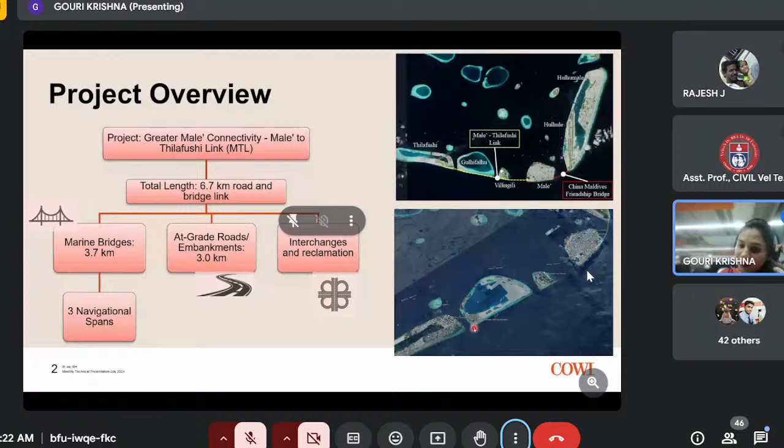What will happen is, for making the bridge at grade level, meaning at the ground level, sometimes there won't be any ground. That is what will happen in these Male islands. We will be taking the bridge in this fashion, so when we take it that way, we won't have any ground over here. So what we will do is reclaim the land - we will put fill material in this water portion, layer by layer, and bring it up to the ground level, and then we can easily take the bridge through the ground level. That is called reclamation.

Now I want to show you a video of this 3D rendering of this project so that you will get an idea.

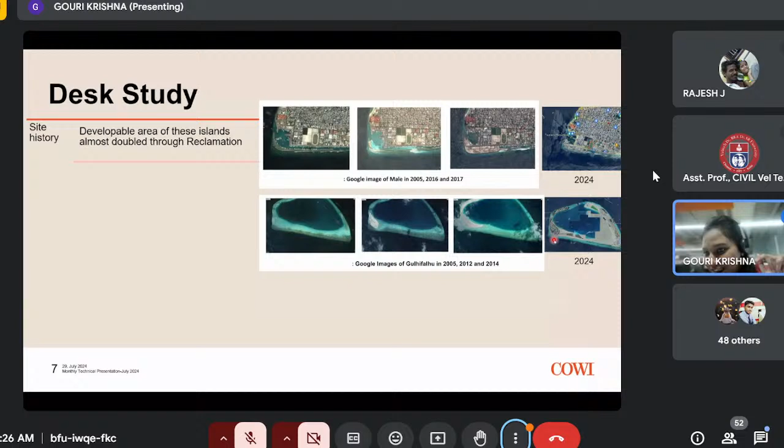In 2005, 2016 and 2017, you can see the development, how it is happening. In Gulhifalhu, it was just like a lagoon sort of island initially, which started getting reclaimed in one portion, then the reclamation extended in this fashion. Recently, when I was preparing this presentation, I looked into how it is looking now - the image quality has also improved, and you can see in Gulhifalhu some construction has also started.

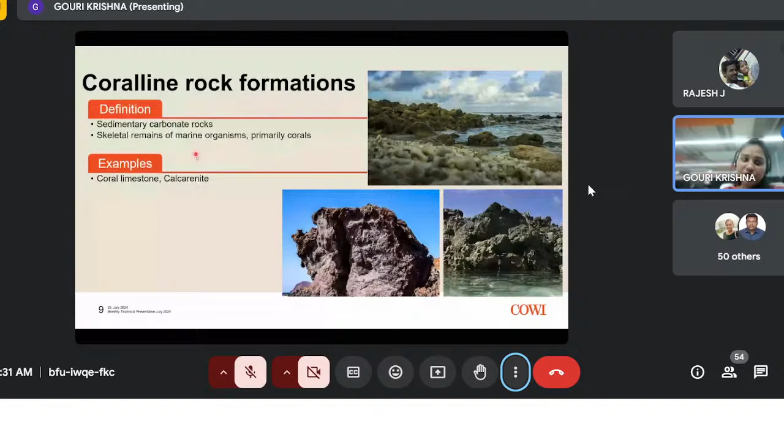Now coming to coralline rock formations, these are some pictures. You can see some porous coral form. As it ages, it will become harder and harder, and that is what you see over here. The major thing about coralline rock formation is it will be of carbonate content, and it is actually skeletal remains of marine organisms, primarily corals. Some examples of such rock formations are coral limestone and calcarenite - these two were part of this project's geology also.

The property will be highly porous, meaning so many pores will be there, and it will be permeable. When so many interconnected pores are there, permeability will be really very high - permeability is basically the capacity of water to flow through these rocks. It will have variable strength and cementation also - where pores are less, strength will be more, but where pores are more, strength will be less. We have so many pores, they call these cavities also.

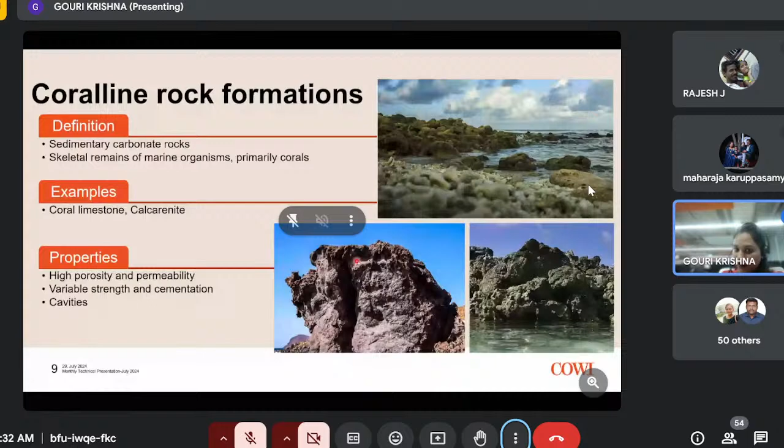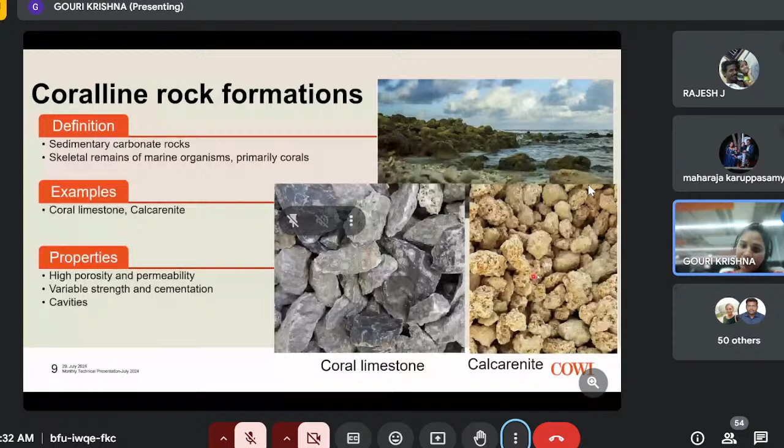What will happen is when we go underground, where the pores are multiple in nature, that portion alone would be like voids - there will be no rock formation, and that is called cavities. This is some example of coral limestone, how it looks, and calcarenite. Coral limestone is a bit stronger than calcarenite, and pores are also lesser in this; pores are a bit more in calcarenite. We will look into more on that.

Now, as I said, we are doing this design as per British standards, BSEN, British standards as per European norms. These are some list of the standards followed. We had a standard in which general rules, principles of geotechnical design are given. Then we had a code for following ground investigation and testing, how that has to be done. Then for the seismic part, earthquake design, we had two codes.

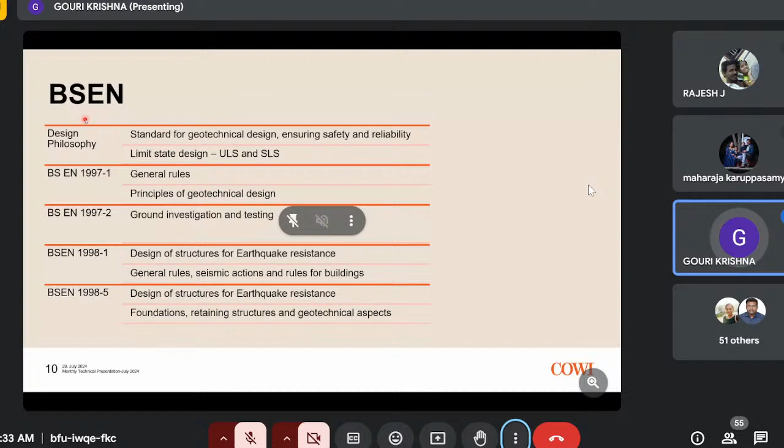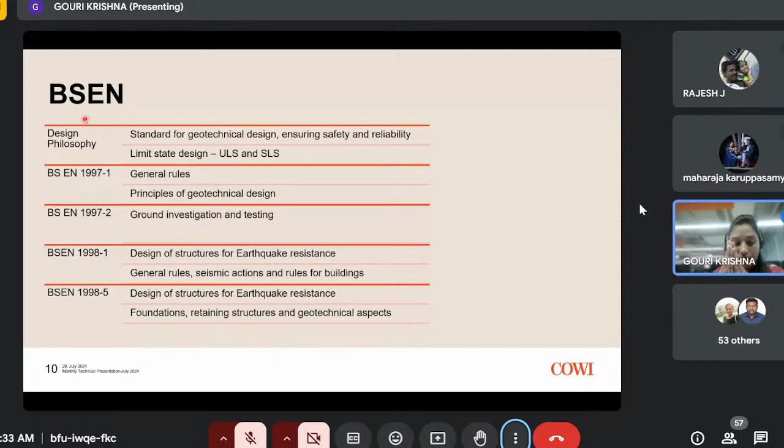Now, what is the difference between BSEN and our normal Indian standards? In Indian standards, we have something called factor of safety. For example, pile design - we are designing it for a load of 1000 kilonewton, and our factor of safety is say 2. If our factor of safety is 2, we have to design a pile for 2000 kilonewton, meaning we are getting a resistance of 2000 kilonewton divided by 2. Like that only we will be designing a pile in our Indian standards. But coming to British standards, we have a concept called limit state design, which is nothing but checking two things: ultimate limit state and serviceability limit state.

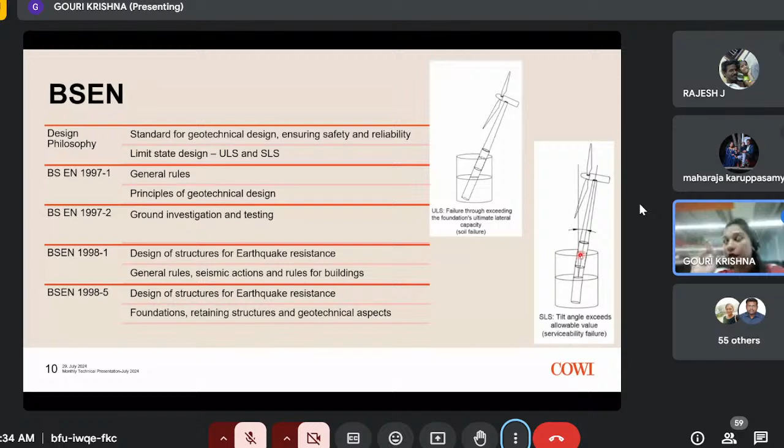So what we will do is check for these two things: is the structure actually failing, or is the structure only surpassing the serviceability criteria? Both have to be checked, and whichever gives a lower pile resistance, that is what we are going to recommend as the pile capacity.

Now coming to BSEN, we have something called geotechnical category, considering many things like risk factor, the structure's relevance and importance, available test results — all these things we use to categorize the structure. In a full bridge structure, this category is basically for how much importance or attention we should give when doing the design. Let me explain that.

So we have three categories. Geotechnical category one will be small and simple structures which don't have any risk. For example, we are constructing a bus stop on top of very good ground, so there we don't have much risk. It's a small structure, doesn't have much load, only people will be coming and sitting. Residential buildings and such places don't have much risk to consider, no heavy load or unpredictable conditions. So that comes as category 1.

Category 2 are structures that are done and studied types. For example, a three-story building or a bridge, if it's a repeated sort of project. We constructed some one kilometer bridge, and we are going to extend it another kilometer. We already know everything — the ground type, the whole design — so designing the next kilometer would be very easy, and that falls into geotechnical category 2.

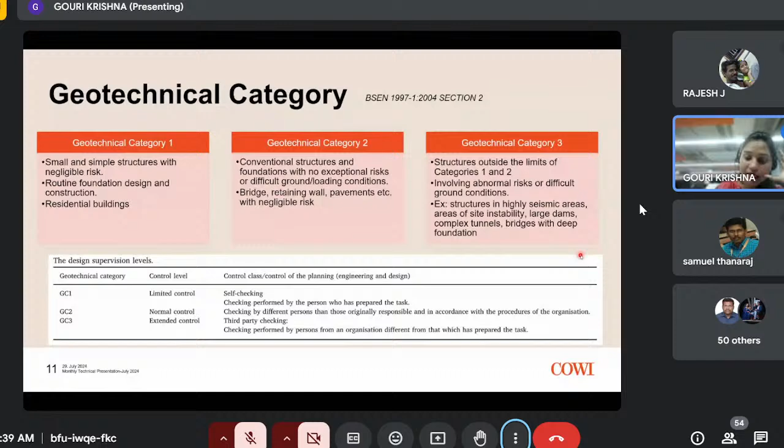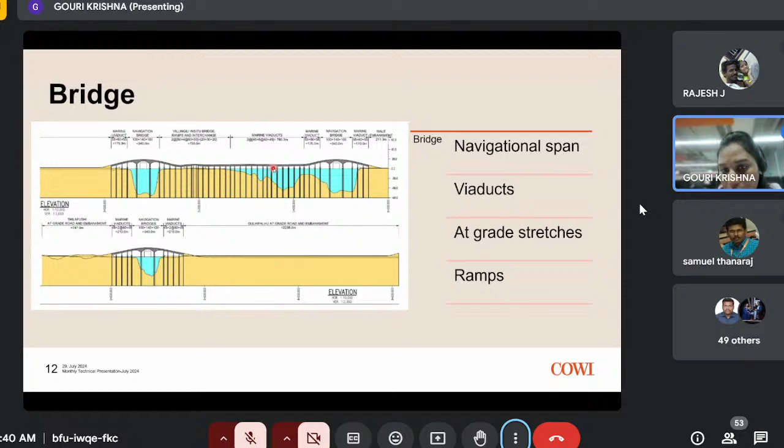These portions are all marine bridges, and over here you can see these are all at-grade stretches. This much at-grade stretch we had. And we will have ramps also - when we go from the ground level to the higher marine bridges, then we will have ramps. Here also we had a ramp like that.

Now this one structure, say for example a four pile group, and we are seeing the elevation, a cross section in this manner. What all will we have? We will have a pier - this is the bridge running. Below that we will have a pier, and just above the water level we will have a pile cap. Then piles will be there, and the piles will be embedded into the ground. This is the structure.

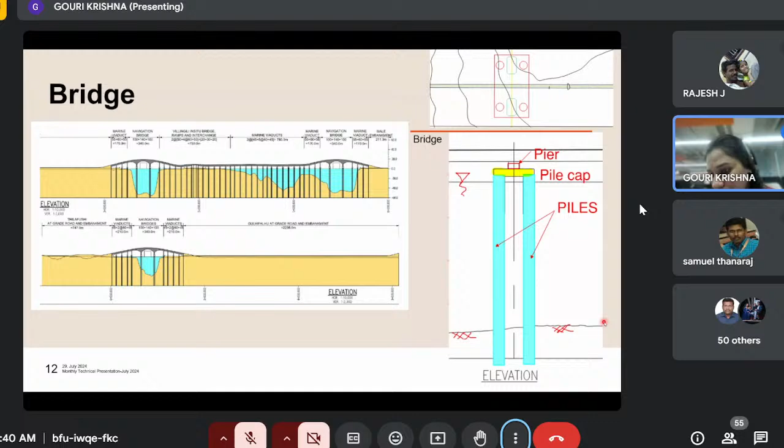Now just to take you through the type of piles and give an idea about piles - a pile is something which will run through lower density material and take it into higher density material so that it can sustain some load coming from the superstructure.

We basically have two types of piles: replacement method, where we remove the soil and put a pile there, and displacement, where we push the pile and drive it in. So in that method we are displacing the soil - when soil is removed, we replace it with the pile. So these are two different types of piles.

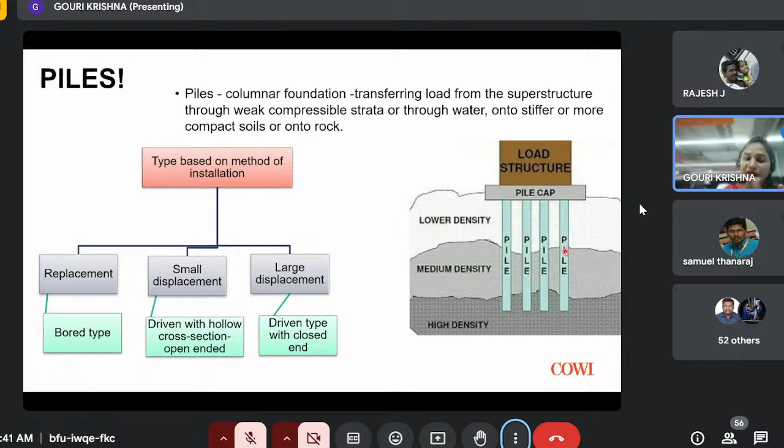Replacement piles are basically called bored piles, and displacement piles are called driven piles. In driven piles we also have differentiation like small displacement and large displacement. When a lot of soil is being displaced, it's called large displacement - when a solid pile is driven, it becomes large displacement. But if a hollow pile is being driven, it becomes small displacement, since a little ground will enter the pile and only a little portion of soil gets displaced. So that is hollow piles.

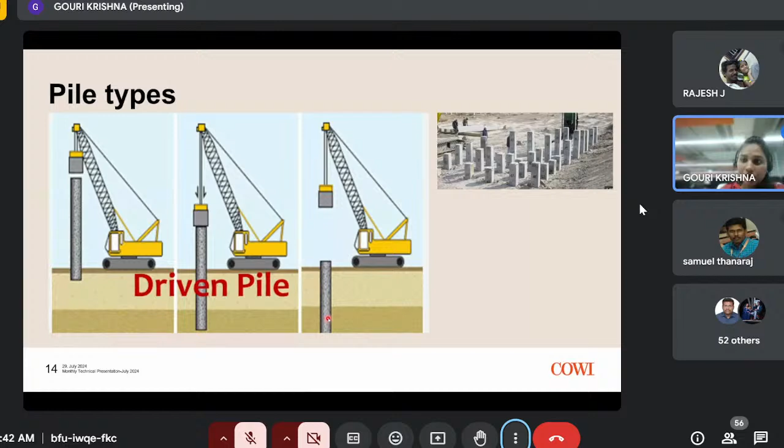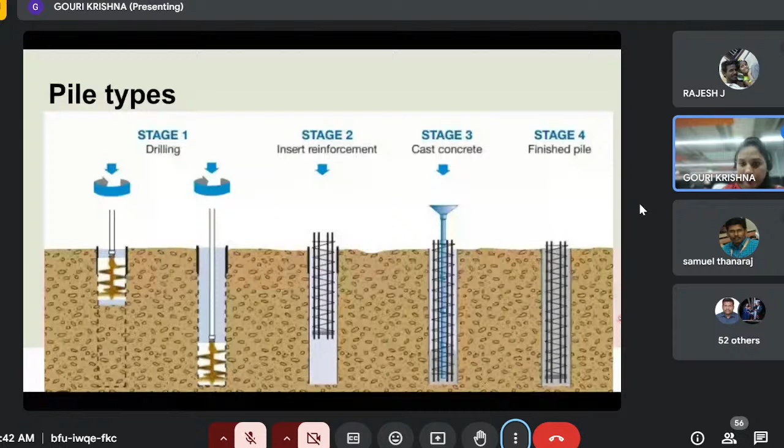So this is just a demonstration of how a driven pile will be - we will be pushing it into the ground. These are examples of driven piles. And now for bored piles, we will be boring, putting a reinforcement cage, and pouring the concrete. This is how a bored pile is made. So in our project, we went for bored piles only.

Now let's see how the ground investigation was done. Before doing ground investigation, we should understand the stages of the project.

So initially a project will be proposed. Thereafter a tender stage will be there where the client gives out the tender, and companies who want to do this design will submit a tender quotation. Many companies will apply, and the client will have many criteria - is it economical, who is giving the lowest cost, or who is more experienced in such projects. Based on that, they will award it to one of the contractors, and the contractor will then put a designer in place.

Designers will initially do a preliminary design based on the already available ground investigation. After that, a detailed design will be proposed, which will finally be done on site. And after all the design and construction, we will do a design validation. For example, for piles we are constructing, we will maybe check 1% of the total piles - if 100 piles are there, we check one pile for pile capacity, to see how much capacity that pile has, like that.

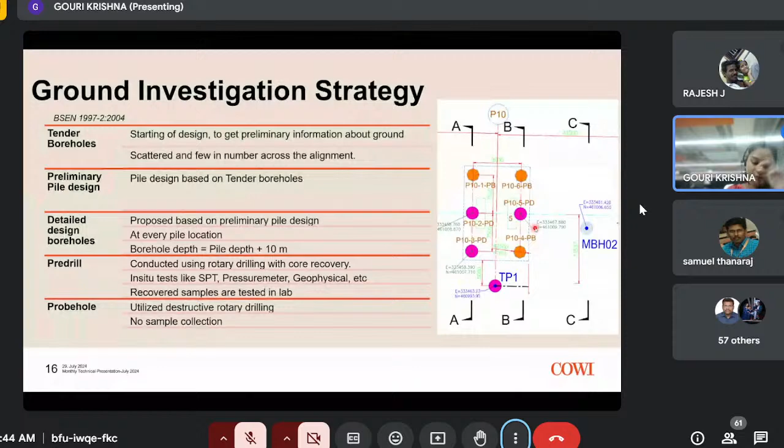Now, what all tests were done? As you all know, SPT was done. Why SPT and not CPT? This is just a general rule of thumb. From my experience, if it is cohesionless soil, then SPT is better.

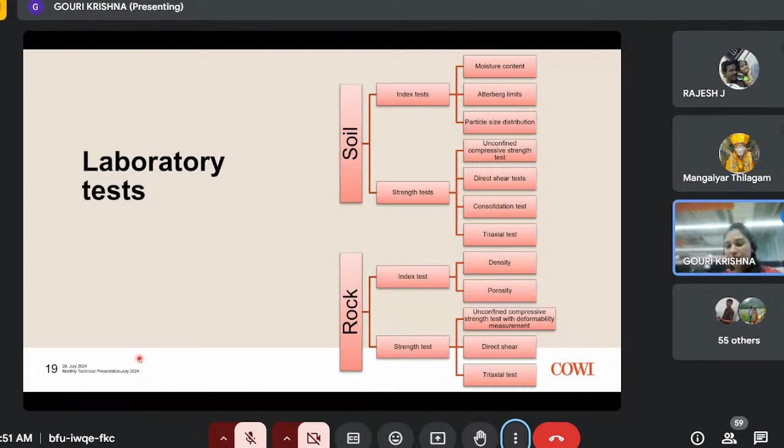Now coming to rock, we have the same distinction of index test and strength test. To identify what type of rock it is, we need basically density and porosity. For strength test, almost similar tests like soil are there for rock: unconfined compressive strength test, when we do UCS test in rock we can also measure the deformability, elastic modulus of the rock. Then we have direct shear test and triaxial test also for rock.

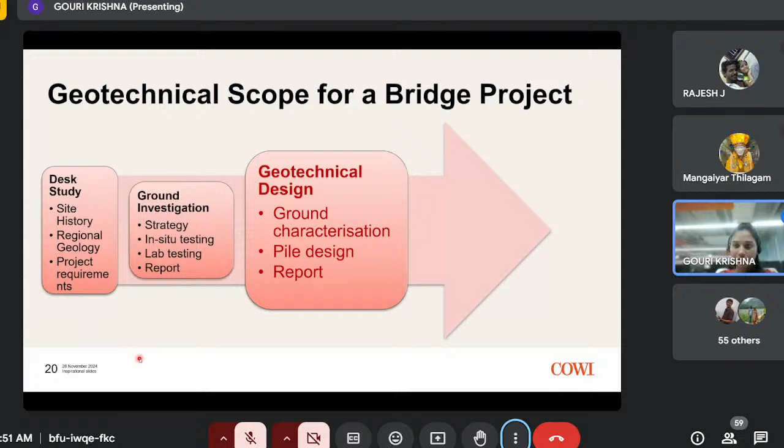We have now discussed the desk study, we have discussed ground investigation. Now let's come to the geotechnical design, our main part. After that, we will look into mitigation measures and pilot test also.

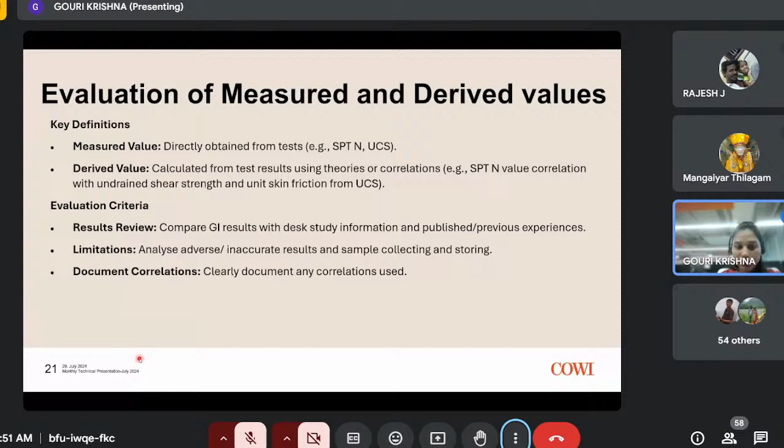Regarding ground characterization, we need to characterize the ground. For that, we have to do two things. First, we have to analyze the distribution of data. How do we analyze the distribution of data? To understand it, we can plot.

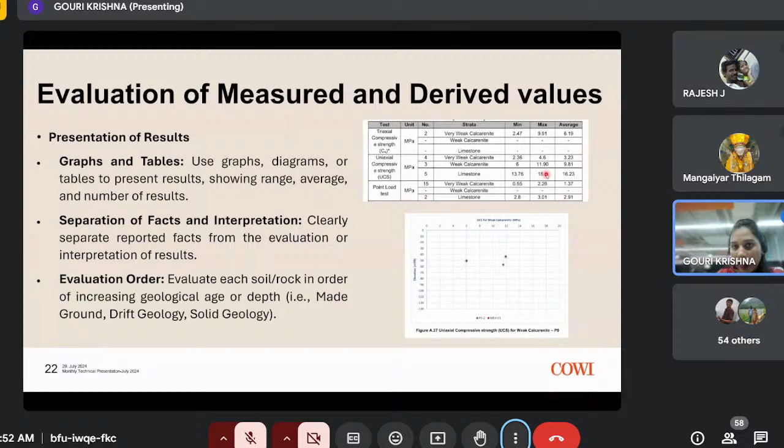Here you can see UCS plotted against the elevation of ground. So we understand the range of UCS is 6 MPa to 12 MPa in this particular portion, minus 40 to minus 60. Then we can go with number of tests and minimum-maximum of all these values, and like that we can check. Once we do these things, we get an idea of what the distribution range is.

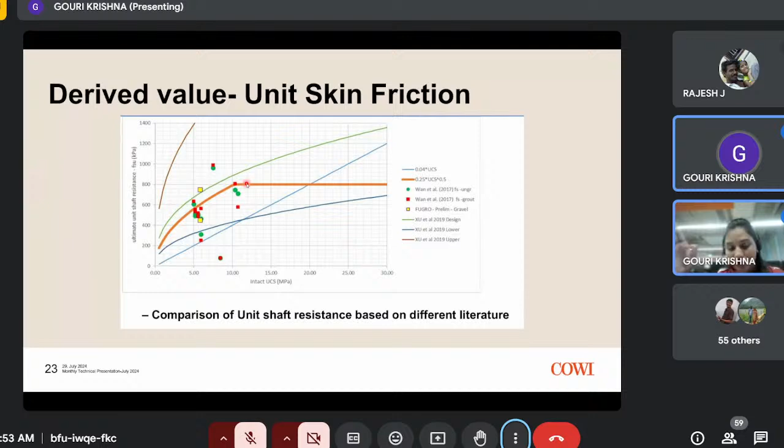The problem is we have results here and there only, but we are generalizing the ground as a whole, so we need such characterization to do that. That is what we do with characterization.

Before going into this, let me run you through some important parameters of this project: SPT, RQD, and UCS. SPT, as most know, measures how many blows occur over 30 centimeters. RQD is based on a 1.5 meter rock core, where we check how much of the core recovered is more than 10 centimeters long. That recovered length divided by the full 1.5 meters, times 100, gives you the RQD, which indicates the rock quality, or how much rock we can retrieve without it breaking.

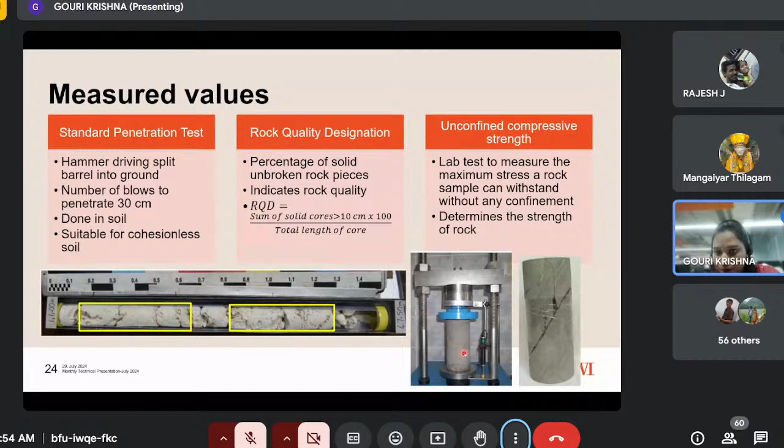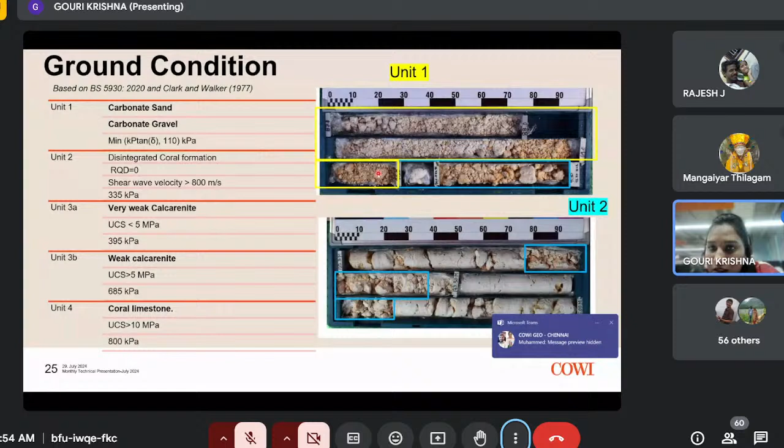Based on all these test results, we divided the whole ground into four units: Unit 1, Unit 2, Unit 3, and Unit 4. Visually, samples that look like sand with broken particles we called Unit 1. If the pieces were a bit bigger, we called it Unit 2. Whatever we could retrieve as a solid core, that didn't break like this and was a solid cylindrical core, was either Unit 3 or Unit 4.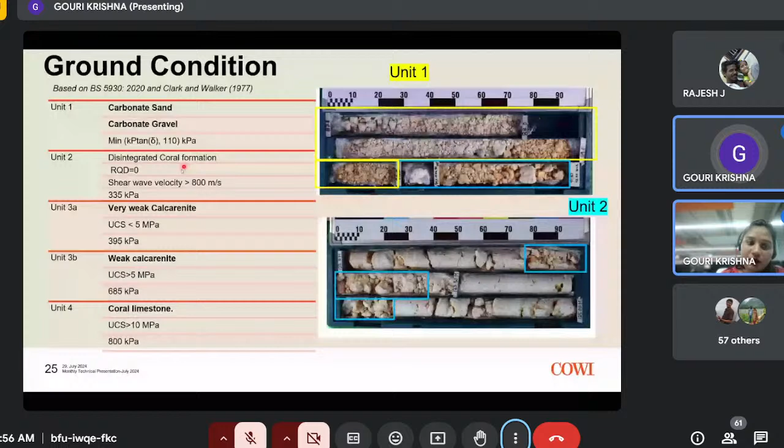Unit 3 was whichever had UCS in the range of 0 to 10 MPa, and whichever was more than 10 MPa we classified as Unit 4. Unit 1 and Unit 2 had a distinction based on shear wave velocity, which I talked about in previous slides. If it's more than 800 meters per second we called it Unit 2, and if less than 800 we called it Unit 1. This 800 meters per second is a distinction value for rock versus soil. So even if a sample appears broken, we believe it was broken due to the sampling process and is actually intact rock in situ -- that's why the shear wave velocity came above 800 meters per second, and we called it Unit 2.

Now let me show you an example of the distribution of all the UCS values. The average might be somewhere around 3 MPa -- average is the value where 50 percent of values are below and 50 percent above, also called the median. We took a value just below that average, because the distribution is quite spread out, so we can't just go with the average. It's better to be conservative, meaning on the safe side, so we went below the average.

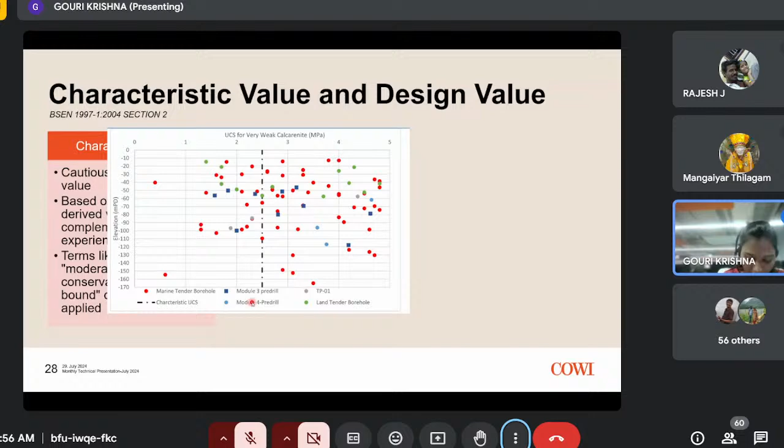Now I will talk about a few things we need to be aware of while doing pile design. First we need to understand how the pile is behaving - is it behaving as a group, or individually? This difference comes based on the spacing. If the piles are widely spaced, individual pile action is more prominent, but if closely spaced, group action is more prominent.

Another thing we need to be aware of is loading duration and variation. Are there any temporary loads, like what loads come on a temporary basis during construction? What are the permanent loads? We should also think about overburden and groundwater - is there any chance of overburden in future, or how much the tide will vary day-to-day? Maybe after 100 years, what will be the tidal level? Such things we should check.

Then we have a choice of pile type, like ground type, based on - as I said before - we have bored piles and driven piles. So that we should decide based on ground type. Here we had so many coral reefs, so if we do driven piles, that will involve hammering action and so much vibration will pass through the ground.

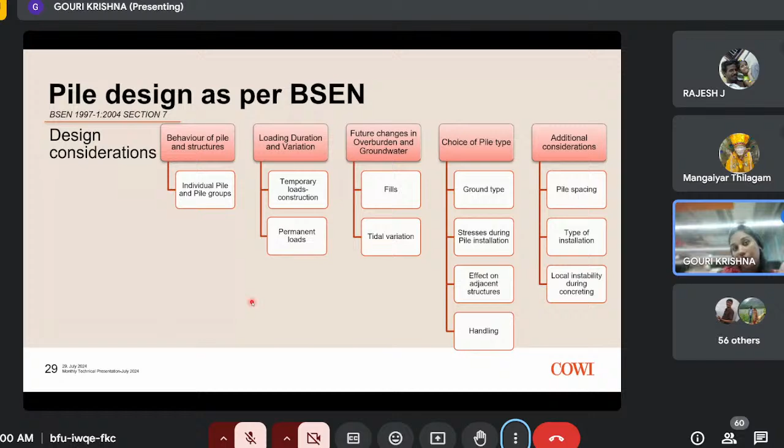Then some additional consideration is pile spacing and type of installation. Also, while doing concreting, will there be any local instability? Sometimes when we have cavities, if that cavity was not identified before boring, and we pour concrete, the whole concrete will be lost through those cavities. If we are aware of such things before going into that, we can somehow prevent them.

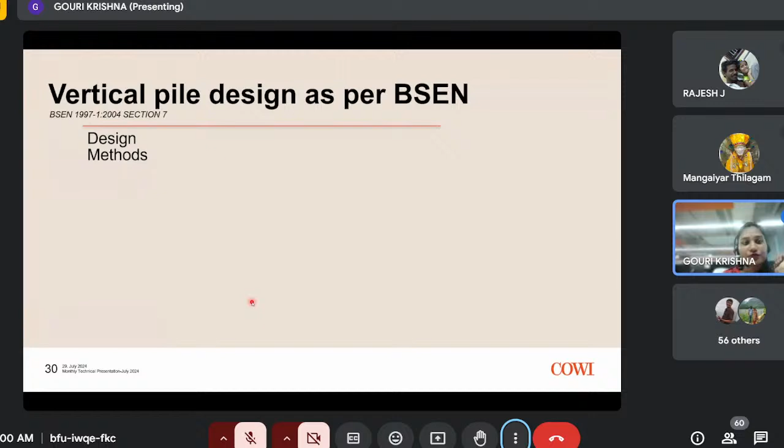Now for doing vertical pile design, we have empirical methods that you would have studied - like the cohesionless and cohesive soil formulas you would have seen, that is basically empirical methods. Then we have static pile load test, where we test the pile at site, and also dynamic pile load test. These two pile load test results give us the pile capacity at the site - how much load it can take for a particular deformation - and through empirical methods also we get the pile capacity.

So these are some of the design methods. How this becomes a design method is basically, we will do a sacrificial pile with similar construction method, similar diameter, similar ground type, just for the purpose of testing, and understand how much capacity it has. When we do a similar working pile with same diameter, same type of concrete and same type of ground, we can confirm that pile will also have the same capacity. That is one method, but it is costly - we can't keep constructing many piles and checking. So that is where we have these empirical or analytical methods to find out the pile capacity.

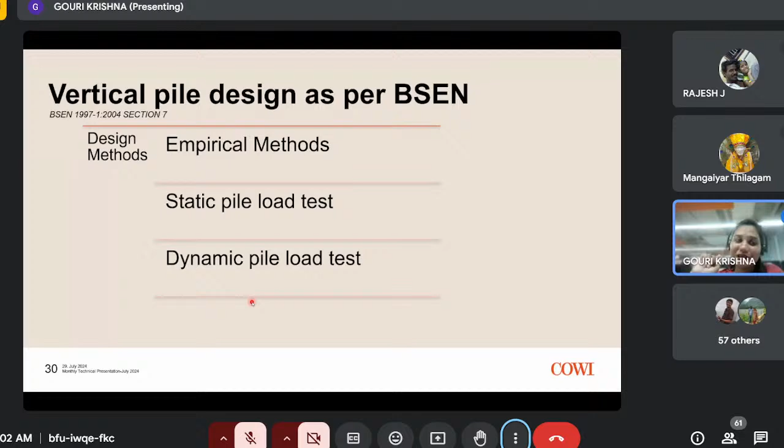Now this BS EN had a difference. As I said, Indian code has factor of safety, right? But what we have in BS EN is something called partial resistance factors, where we have different factor of safeties for base capacity, skin resistance, and for tension.

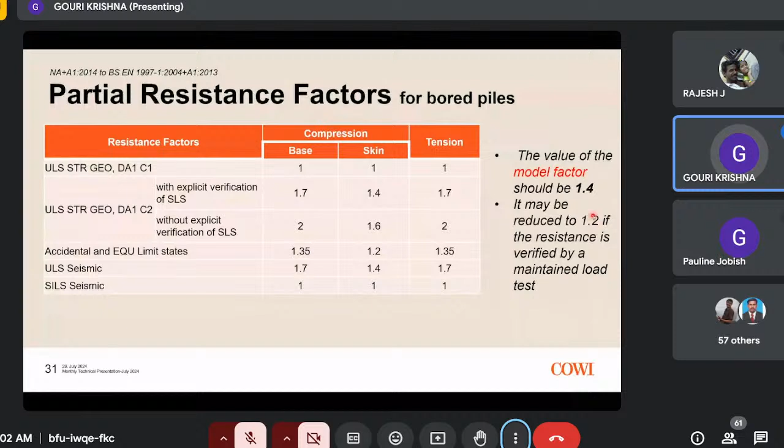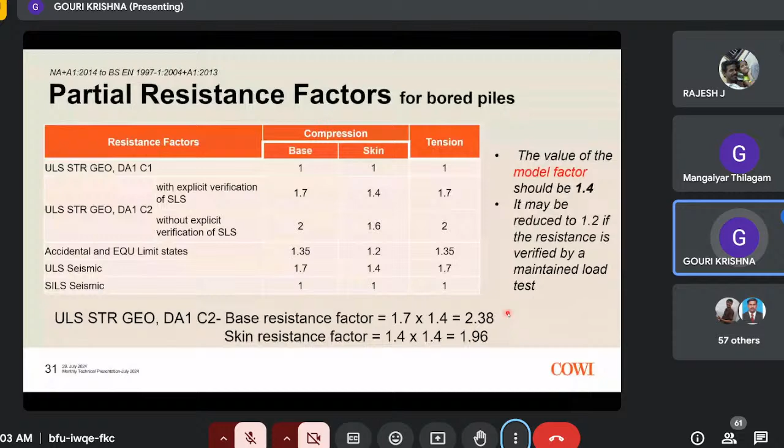So this 1.4 and 1.2, this 1.4 will be multiplied with the skin resistance factor, and that is what the final skin resistance factor will be. Similarly, base resistance of 1.7 will be multiplied with 1.4, and that is what we have to divide the ultimate end bearing capacity with to get the safe bearing capacity.

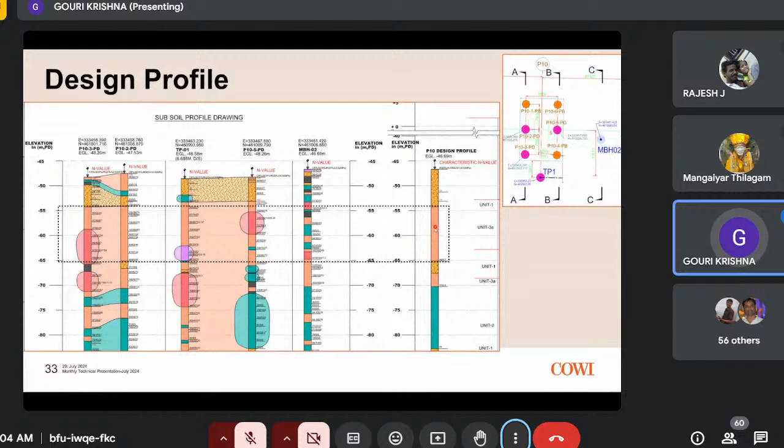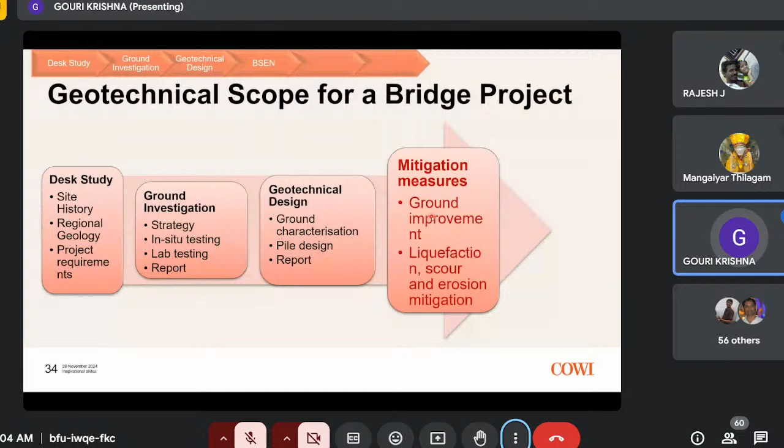Now we will see about the mitigation measures. Here, no ground improvement was required as such. We just had reclamation here and there. Then for liquefaction, scour, and erosion, what we did is identify what is the scour level.

Relative movement will be there between pile and soil, and that is how the pile capacity is being formed. So if there is a deflection between the soil and the pile, there won't be any friction and there won't be any skin resistance. So it is basically to reduce the skin resistance by a factor until the fixity level, especially when the pile is in marine conditions and has a long freestanding length.

Freestanding meaning the pile portion above ground. In such situations, the deflection will be high, and this sort of reduction up until fixity level is something we should be cautious about. So that also was done over here.

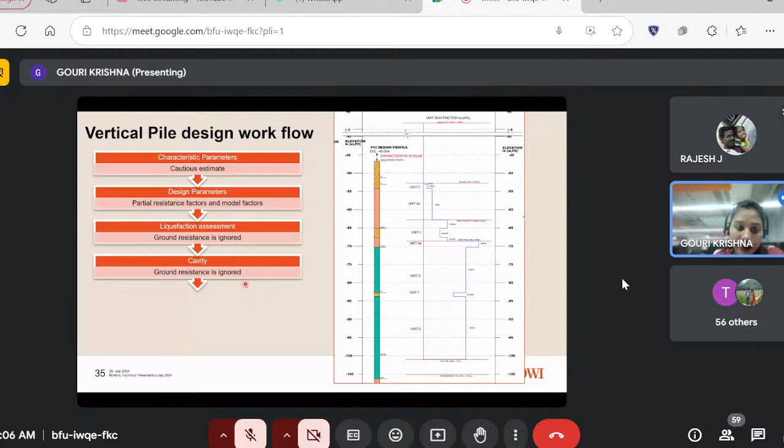If liquefaction was there, liquefaction was also ignored. Thereafter, cavity also, if there, was ignored. So what we did is measure the total length of cavity up until the pile length, and that was added at the end as extra pile length. Then we had cyclic loading, which I mentioned reduces skin resistance until fixity level. Scour ground resistance was also ignored.

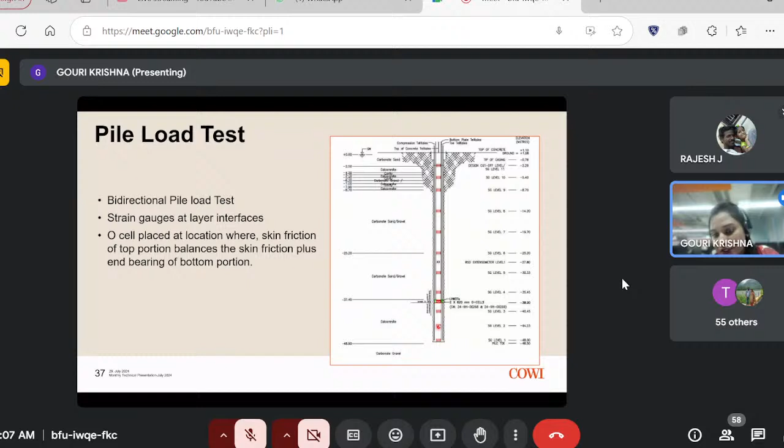Now we looked into all these things, and finally we have the pile load test. Here, bidirectional pile load test was done, where we put a load cell at a particular depth where below it, the skin resistance plus base resistance equals the skin resistance above. So we put a cell there and load it in two directions, to find out how much skin resistance is there in each of these layers.

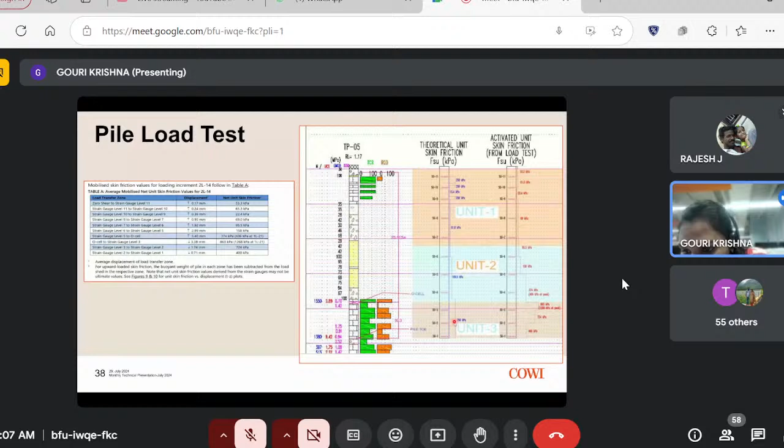So when we found out like that, over here we took some 250 kPa for design, over here we took 109.5 for design, and finally we got some 374 kPa. So we are validating that our design value is fine.

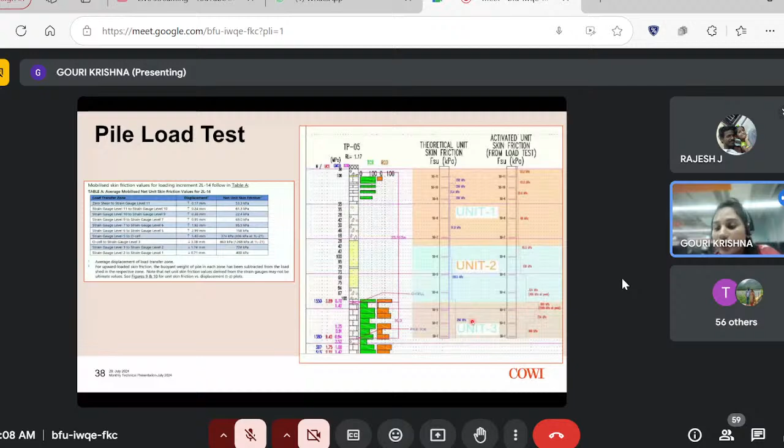And over here what happened was, the values we measure, we can use only if the resistance goes above, reaches a peak, and it mobilizes into a straight line like that. If it doesn't mobilize in that fashion, it indicates that the pile has not reached its ultimate capacity. So over here you can see that difference.

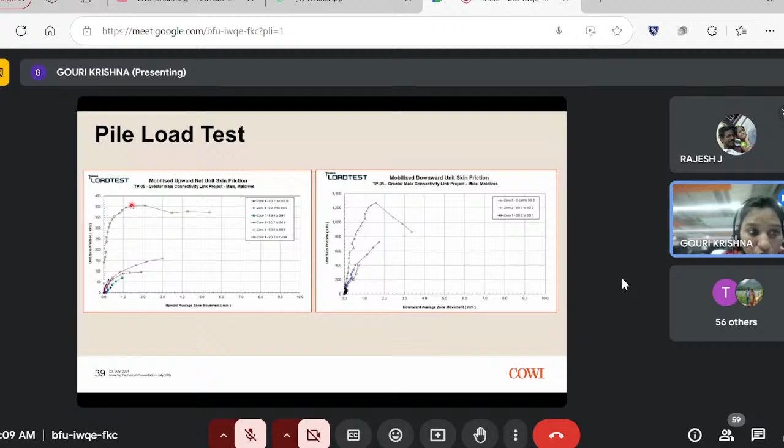This is unit skin friction versus movement plot. So the pile is moving, or rather pile is displacing, that is pile deforming, that's the correct terminology. That is happening, but what you can see here, it is not mobilizing and has not reached the peak value. So some more threshold resistance is there inside the pile which we were not able to test out, but maybe for this layer alone we were able to do it because it reached the peak and mobilized.

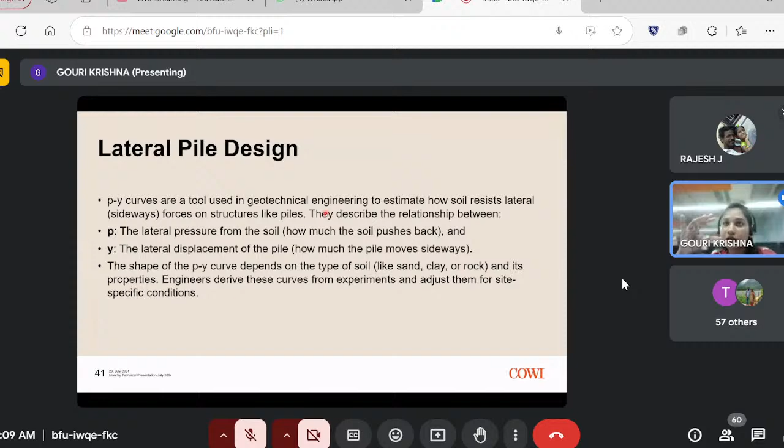Something interesting in this project, a bit different, was how we estimated the lateral pile design. For getting the lateral pile behavior, we have something called PY curves. For a particular P value, that is lateral pressure, how much lateral displacement will happen in the pile. Such curves we have for different types of soils.

This P and Y behavior we can input into structural softwares like Midas, and that is how we simulate the soil in those softwares. So this is how we do the structural design and simulate the soil.

Basically, as per my knowledge in the industry, we have different softwares for structural design and geotechnical design. We don't have an integrated software as such. Structural softwares won't have the ability to model the soil characteristics, while geotechnical softwares like Plaxis and similar can't properly model all the structures. So we have to go with some assumptions.

So such an assumption used by structural designers for modeling the ground behavior is what I'm explaining now, called PY behavior. At each depth they will tell the software that for this lateral displacement happening, this is the lateral pressure or capacity at that particular portion. For example, due to structural loads, if the pile is moving by 5 mm, the lateral resistance which the soil will provide is 110. That is how we model the ground in the structural software.

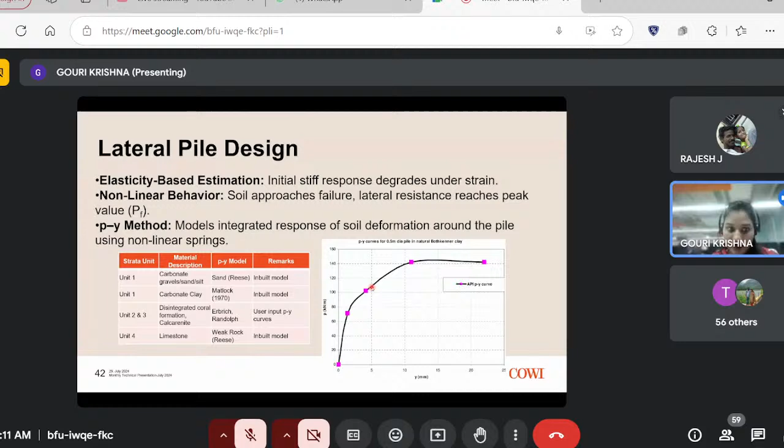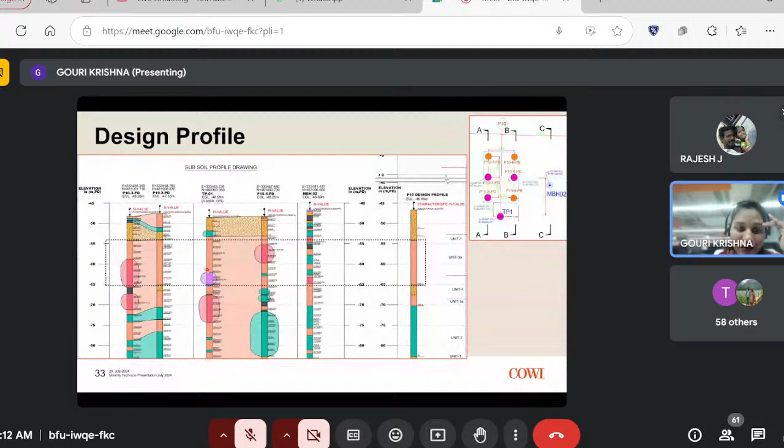So here you can see such a distribution. The pile is not at all behaving in a uniform fashion. Here and there we have different types of scattered behavior. So that was a huge risk factor in this whole project.

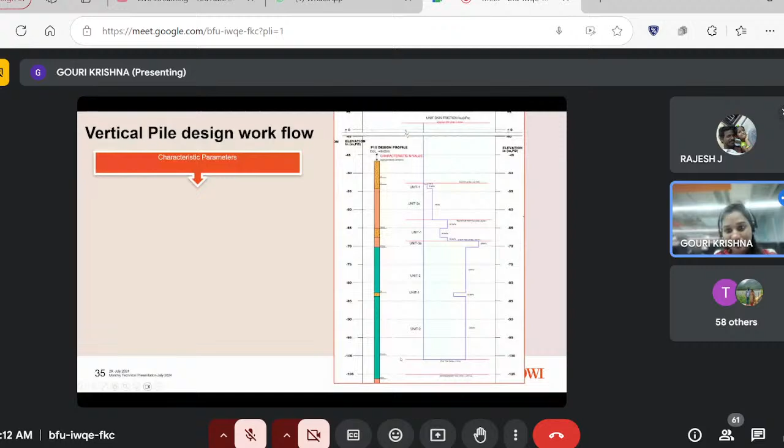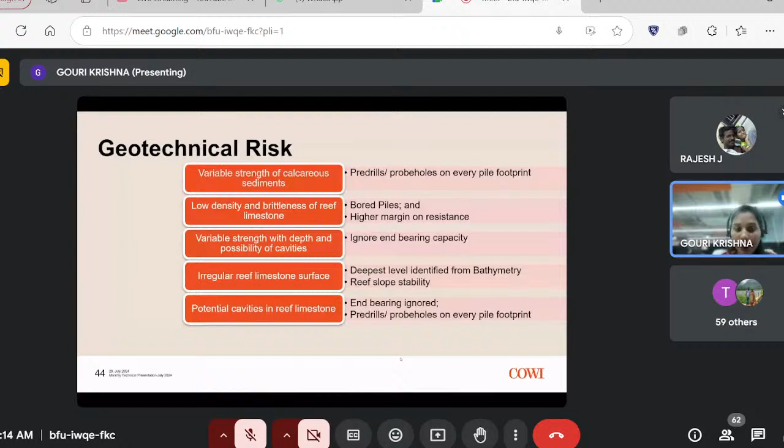Then the reef limestone, if you remember the ground profile, was very much irregular. Because cavities were there and because of this much variable strength, we ensured that a borehole would be done in each of the pile footprints.